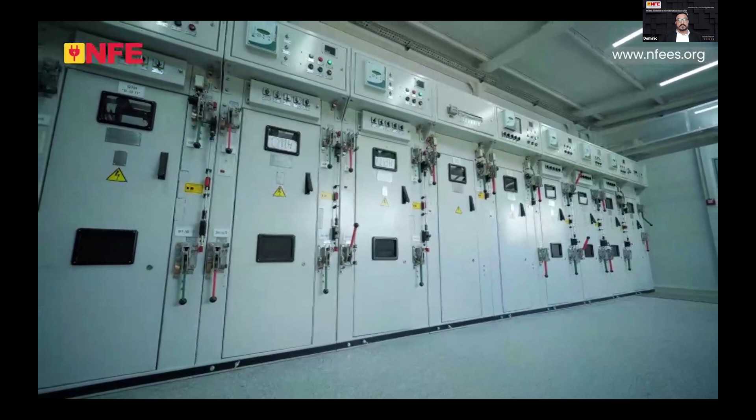Electricity is the heartbeat of modern India. It lights our homes, powers our industries, runs our hospitals, and connects every corner of our nation. Yet behind every switch and circuit lies a silent responsibility, the responsibility of safety. Every year, thousands of electrical fires and accidents remind us that one loose connection can change lives forever. According to national data, over 25,000 electrical fires occur annually, claiming lives, destroying property, and halting progress. Most of them could have been prevented through better design, better supervision, and better awareness. The country witnessed repeated accidents and increase in casualties due to poor installations, lack of inspection, and absence of accountability.

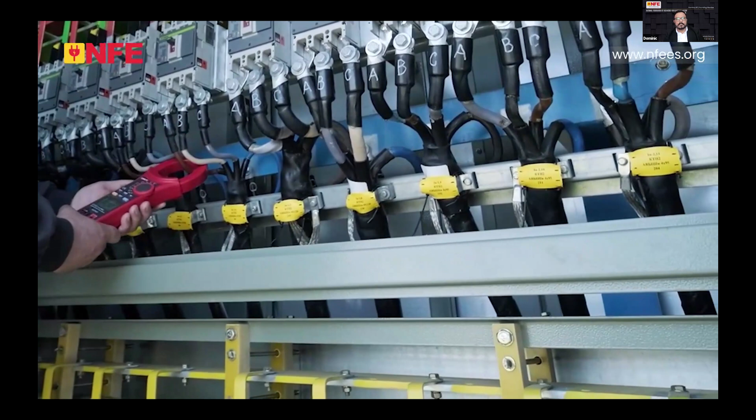They decided to take action. Thus began a movement, the National Federation of Engineers for Electrical Safety, NFE, started with a small group of like-minded professionals with only passion and purpose. They began spreading awareness through webinars, workshops, and training sessions, one city at a time. What started as a conversation soon became a nationwide movement for safety and change. In just a few years, NFE has grown into one of India's fastest-growing engineering societies, uniting over 2,500 plus engineers across 12 chapters in India. Each chapter drives its mission through learning, collaboration, and public awareness campaigns. NFE has conducted over 180 webinars and 50 workshops on the National Electrical Code of India in collaboration with the Bureau of Indian Standards, BIS. These programs are helping thousands of engineers stay updated with safety codes, best practices, and new technologies.

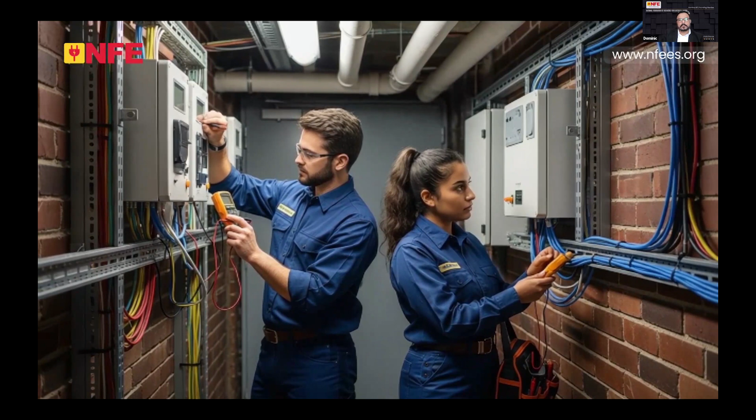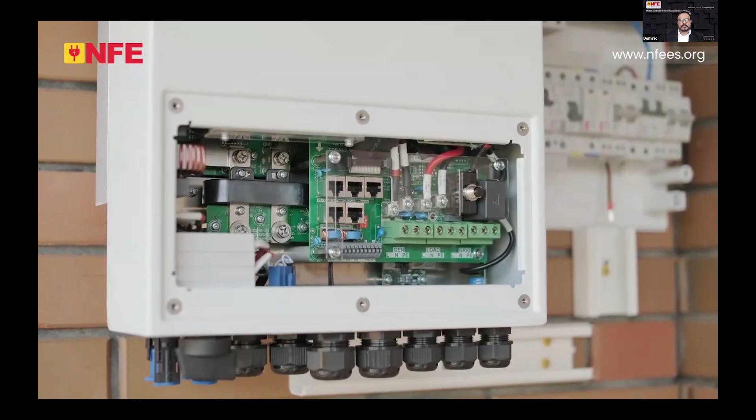NFE's signature annual event, ElecSafe, brings together government leaders, consultants, manufacturers, and innovators. It celebrates best practices and showcases electrical safety products that make buildings and industries safer across India. NFE's student chapters inspire young engineers to design responsibly while its professional programs help experts achieve certifications that matter. Together, we are building a new generation of engineers who think safety first. From a humble start to a national movement, NFE continues to lead with integrity, commitment, and purpose. Because electrical safety is not just a regulation, it's a responsibility. Together, let's build an electrically safe nation. National Federation of Engineers for Electrical Safety. Join NFE as a crusader for change, spreading awareness, training professionals, and advocating compliance.

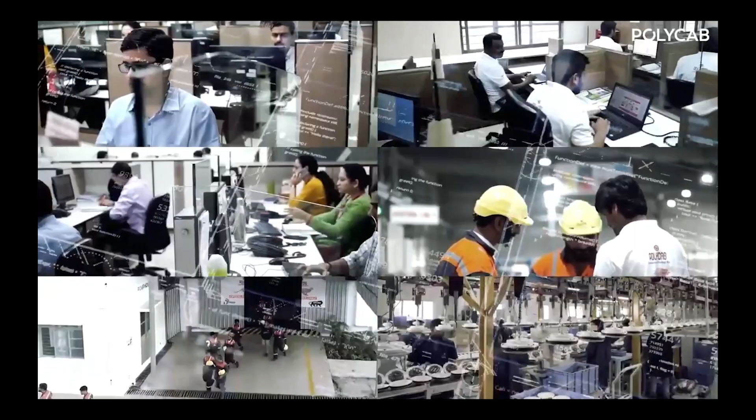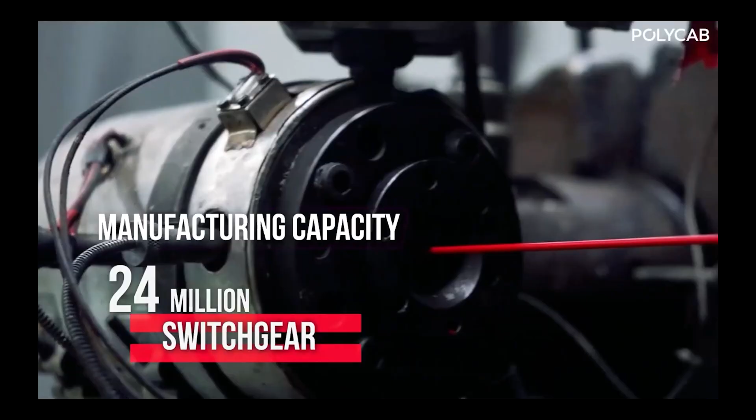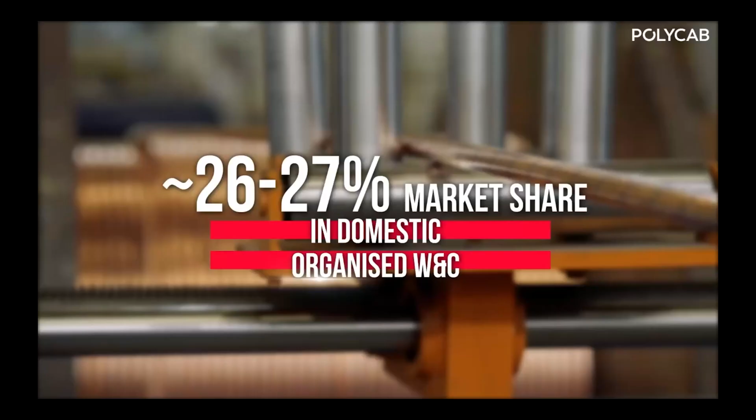In every heartbeat of a home, in every spark of a city, there is a rhythm powered by Polycab. Every great journey begins with a spark, a dream to connect, to conduct, to empower. From the very beginning, safety has been our promise, a promise that powers homes, protects lives, and builds trust. What began as a dream in a modest shop in 1964 was wired into reality in 1983 as Polycab India Limited, now India's largest wires and cables manufacturer. From wires and cables that protect your loved ones, to fans that cool your homes, to lighting that brightens your spaces, Polycab touches lives in more ways than you can imagine. Polycab is a true manufacturing marvel. With state-of-the-art facilities, backed by robust R&D and integrated capabilities. We are not just building products, we are partners in building India. From temples to tech, from railways to runways. Behind every product is a passionate team. 4,800 plus employees, 4,300 plus distributors, and 200,000 plus retail outlets united by Polycab Soch. Our commitment goes beyond business. Through CSR, we uplift communities in education, healthcare, agriculture, and more. Sustainability isn't a checkbox. It's the rhythm of our future, and we are tuned in, driven by a purpose to make homes safer and enable a secure India. Polycab has grown exponentially. As the nation progressed, Polycab became the nervous system, laying copper veins of connectivity. Polycab is truly a made in India brand. With a global reach, our pulse is now heard across continents. We are a family in this line from 4 decades, work hard and work for India. We want to expand our capacity too large because I want to grow, I want to get others grow, I want to support everybody and I want to see that our country should grow. Beyond all lies our true mission, people. Every product we build, every solution we deliver carries our vision of connecting all to a bright and safe future. When you choose Polycab, you choose safety, reliability, and a partner for life.

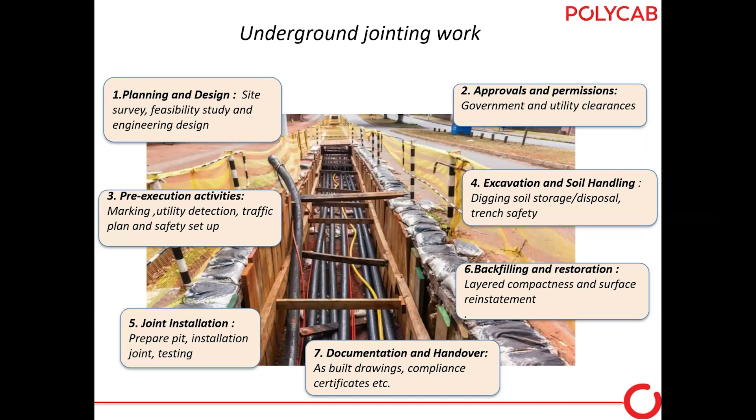So you can understand how crucial joints are. It's not just selling of the product actually. This is basically a large activity behind the jointing work. So as our topic says, the importance of cable accessories. Why important? So here I have mentioned why cable accessories are required.

Cable accessories are required because we have to join the cables. Basically we cannot manufacture cables kilometers to kilometers; cables come in 500 meters or 1000 meters. We cannot manufacture 2 kilometers, 3 kilometers, 10 kilometers because of two reasons: transportation restrictions and spool sizes. That's why you see cables always manufactured in 500 or 1000 meter lengths. Then cable jointing is the process of joining two cables with one another or terminating at one end.

Yes, I will show this pointer also. Here. Cable joints and terminations are used to connect cables and facilitate the flow of electricity. They are essential for connecting and terminating the cables at the equipment level. Cable joints and terminations ensure electrical, mechanical, and environmental safety of the system. So these are actually the functions, the requirements from cable accessories, and that's why cable accessories are required.

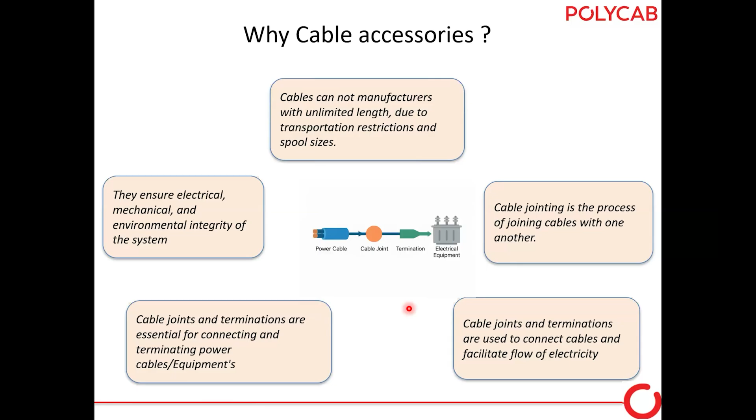So whenever we choose any manufacturer for cable accessories, heat shrink joints or cold shrink joints, any type of joints, what do customers expect from us? Heat shrink accessories must meet stringent standards to ensure reliability, safety, and longevity in the power system. So three parameters are always there whenever a customer chooses cable accessories. First, electrical performance. Environmental protection has to be provided, and safety and compliance.

In electrical performance, it should ensure current carrying capacity as per the cables and the requirement. So if cables are 11 kV, 300 square mm, the cable joints or termination should be the same. It should provide electrical insulation also, or provide electrical stress control. We will see what electrical stresses are there in detail in the coming slides.

Second, even though we connect two cables, we require environmental protection also. Sealing against moisture ingress has to be there. If there is a PILC type of cable, oil leakage should not travel from one side to another. Then resistance to mechanical damage; abrasion and chemicals should not affect the joints. In safety and compliance standards, it should guarantee earthing, provide desired shielding to the cable, and improve the fire resistance also. So any customer asking for joints or terminations expects these things from the manufacturer or the product.

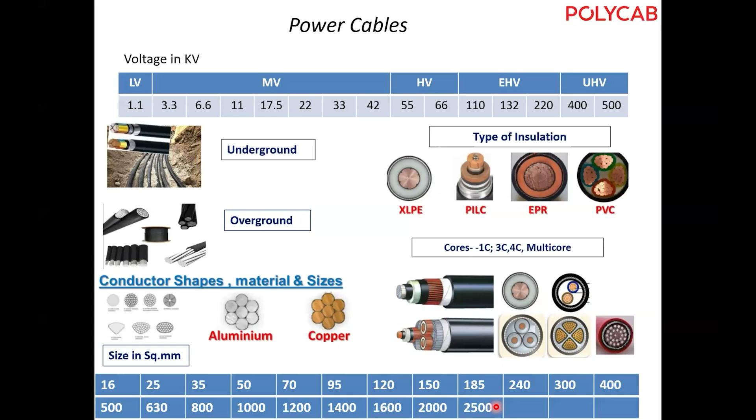Let's understand the construction of the cable. As I understand, you might all be from the same field, so you know the cable constructions very well, but I will just run through this in a few seconds.

This is a 3-core copper cable. Copper conductor is there, over that a semi-conducting layer, over that XLPE insulation, over that again a semi-conducting layer. These three cores bind together, and to give the round shape we use fillers.

Over that, wrapping tape is always there. Over the wrapping tape, armoring is there. And over the armoring, the outer sheath is there.

These conductors have different conductor shapes - sometimes solid, compact, compressed, and concentric. This is a copper cable; instead of copper, aluminum will be there.

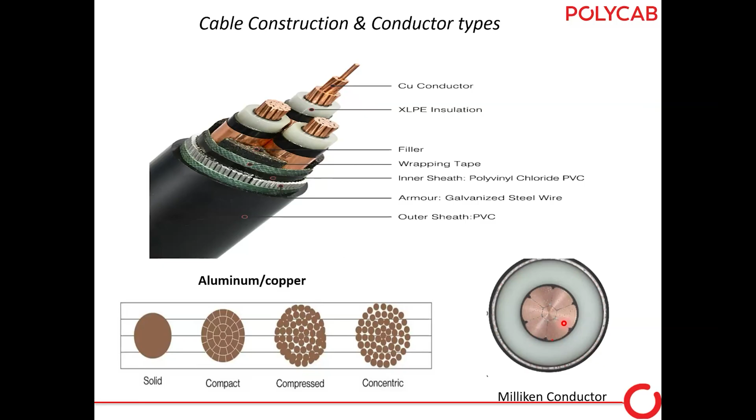Here on the right side, if you see, it's a Milliken conductor. These Milliken conductors are used for EHV. A Milliken conductor has small thin wires. This is used to reduce the skin effect basically, and that's why it's extensively used for EHV.

So let's come now to heat shrink cable accessories. There are two types of cable accessories. Whatever we discuss here right now is from the 1.1 to 33 kV cable accessories grade only. There are two types of technologies in India or across the world - one is heat shrink cable accessories, another is cold shrink cable accessories.

We are manufacturing only heat shrink cable accessories, and in India also 99% of customers are asking for heat shrink cable accessories. Cold shrink cable accessories are used where refineries or mines are there, wherever torch or flames are not allowed - they basically use cold shrink technology.

Heat shrink technology is extensively used because this technology proves how reliable it is. It's a trusted solution across industry, in terms of electrical insulation, mechanical protection, environmental sealing, and stress relief. That's why heat shrink accessories are widely used in India.

Key features are there - basically heat shrink accessories come as tubing, heat shrink tubes. Shrink ratios are generally 2:1 and 3:1. It has excellent dielectric strength, whatever heat shrink tubes are there. Resistance to abrasion, chemical and UV - even if these heat shrink tubes are used in chemical areas, or put in soil or anything on those joints, it has excellent resistance properties there.

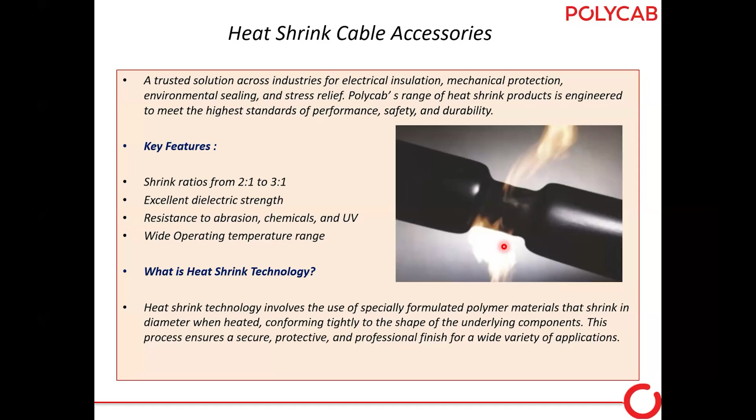This process ensures a protective and professional finish. When we say heat shrink cable accessories, it shrinks when you give it heat or flame. But this cross-linking always happens in this heat shrink technology.

There are two phases of the cross-linking process: one is chemical cross-linking, and another one is e-beaming or nuclear cross-linking. Chemical cross-link and nuclear cross-link are two different methods of cross-linking of the heat shrink tubings.

When heat shrink products undergo the cross-linking process, it enhances the thermal and mechanical properties. So by cross-linking, thermal and mechanical properties of the tubings increase.

Another term always used in heat shrink technology is memory effect. What is the memory effect? When you expand this heat shrink tube at the factory and send it to site, and when you again give heat to the tube, it shrinks up to whatever memory effect it has. For example, if I send one heat shrink tube which is size 100 by 50 - when I say 100, I expanded that tube at the factory by heating to 100 mm. Again, when I heat it at site, it shrinks up to 50 mm only. So that's a memory effect.

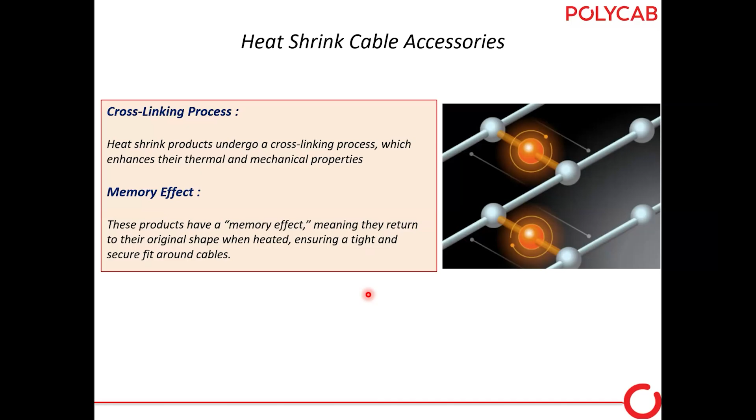General application - you all know wherever cables go, cable accessories are required. So industrial and commercial infrastructure, distribution networks, substations and switchyards, and renewable energy, solar and wind - these are the broad categories of cable accessories segments or application.

We can understand wherever cables are required, termination and joints are definitely required. Even in our household we use wires, and those wires we use through lugs, small lugs. So wherever cables are there, cable accessories are definitely required.

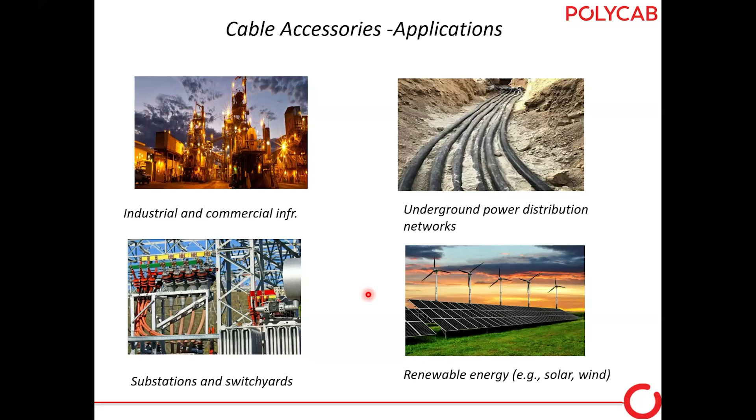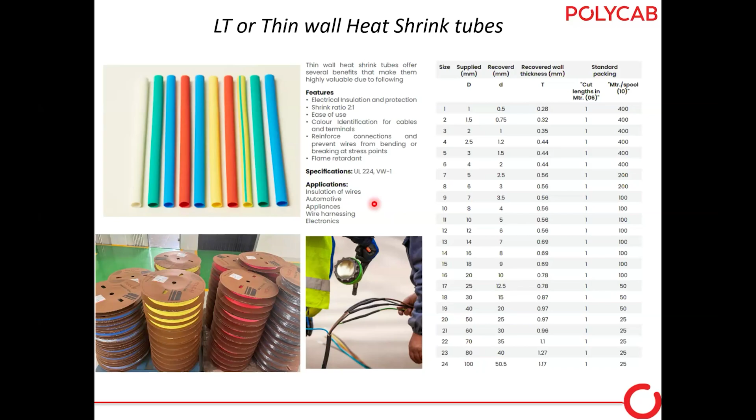Now let's come to the classification of cable accessories. Generally whatever we are discussing is for armored cables. So 1.1 kV low voltage and medium voltage - we broadly classify cable accessories as low voltage, up to 1.1 kV, and medium voltage, 11 kV, 22 kV, 33 kV. So we generally classify these cable accessories into two voltage classes.

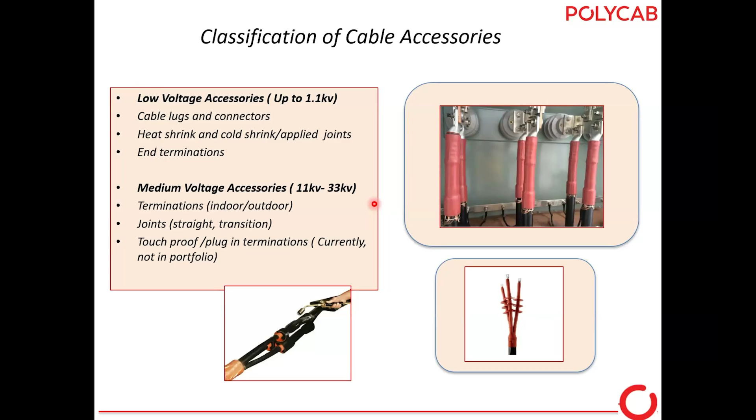Let's see low voltage cable accessories. Here I have shown the termination and joint photographs. Right now in many utilities, or in olden days, resin cast joints we were using. Resin cast joints - resin and hardener we take, we mix the resin and hardener and stir it and then pour it into the joint. It takes almost 2 hours to do the jointing work. But nowadays many customers are using heat shrink cable accessories.

So this is a termination. Let's understand - there are different types of low voltage cable accessories: heat shrink, cold applied, or resin cast joint. Let's see this termination - I will just show you how the termination happens.

So this is the lug. Over the lug we apply the XLPE insulation. We provide the mastic here - that mastic is for the sealant purpose, so water should not go from this point. That's why we provide a breakout, give an earthing element, and provide tinned copper braid. So this is a termination.

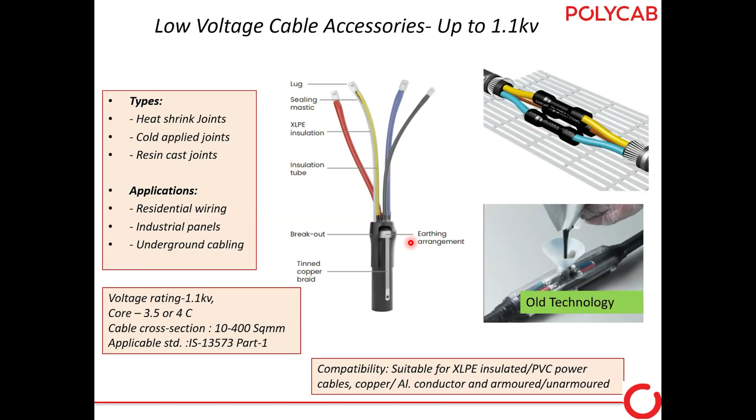Generally these LT cables come for a 3 core, and cable accessories come for the 3.5 and 4 core system. But if single core or 2 core is required, that also we can provide.

Let's see the medium voltage cable accessories now. Medium voltage cable accessories are there for 11 kV, 22 kV, 33 kV.

Types are based on the technology: heat shrink joints, heat shrink termination, cold shrink joint, cold shrink termination, and screen plug-in termination. Nowadays, screen or plug-in joint terminations are many times used wherever GIS or RMUs are there. Their customer uses the screen or plug-in termination.

Based on applications, we classify straight-through joint, transition joint, and branch joint. Transition joints we use wherever PILC to XLPE joints are required; there transition joints are used. Voltage rating 11 kV to 33 kV, single core, 3 core. Cable cross sections we use 35 to 400 square mm.

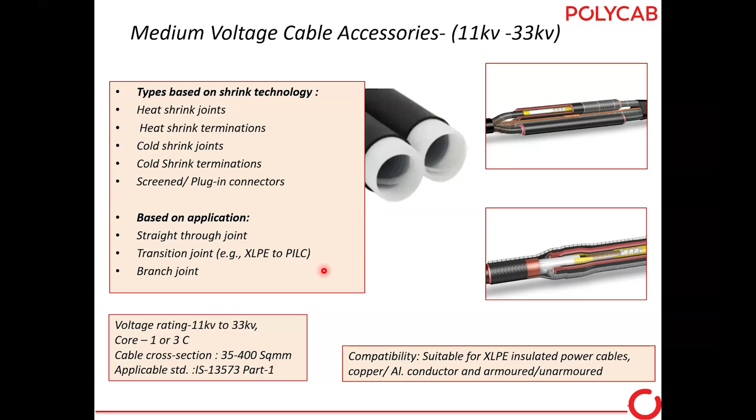Application standards are IS. These cable accessories are as per IS 13573 part 1, and testing is also as per part 2.

So let's see the joints first. There are different components required for making the joints, and each component has its own function, but I have broadly classified these under 5 categories.

One is electrical connections, stress controllers, voltage grading, electrical insulation, mechanical protection, and environmental sealing. For electrical connection we use ferrules. For stress control, we use semiconducting tubes. Let's see them one by one.

For electrical connections, we use the ferrule or the mechanical connector. It is used for connecting 2 cables. I have shown here the pictures. Jointers always prepare the cables as per the dimensions mentioned in the installation manual.

It prepares first the conductor, then prepares the XLPE insulation. From here to here, remove the semiconducting layer. That way, the jointer prepares the cable as per the installation manual given in the box, and only as per that manual.

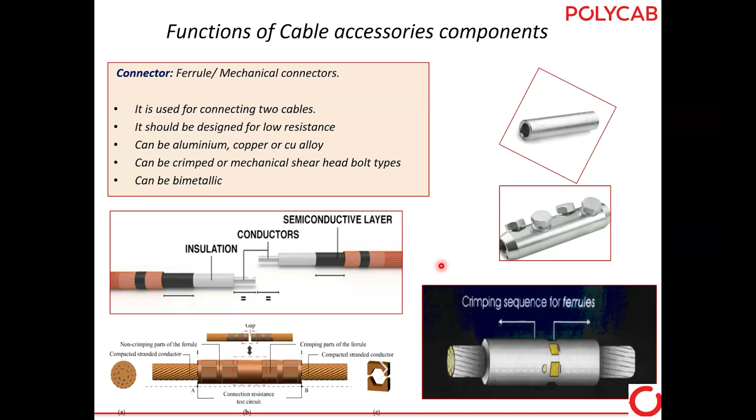Let's see the next component, the stress control tube. This is very important in any cable joint and termination. Whenever you go from 11 kV to EHV, stress control tube, or stress cone as we say in EHV, is very important. If the stress control tube is not up to quality standard, the joint or termination definitely starts failing early. So designing of the stress control tube is very important.

The stress control tube's impedance should be precisely defined. It's a well-balanced permittivity that has to be there in a stress control tube.

Let's see what happens if we do not use the stress control tube in the joint or termination. Here I have shown 2 photos: this one is without stress control tube, and this one is with a stress control tube.

So the jointer prepares the cable. This is the conductor, over that the XLPE insulation, and over that the semiconducting layer. This is the actual construction of the cable. If we do not use a stress control tube and we charge this cable or joint...

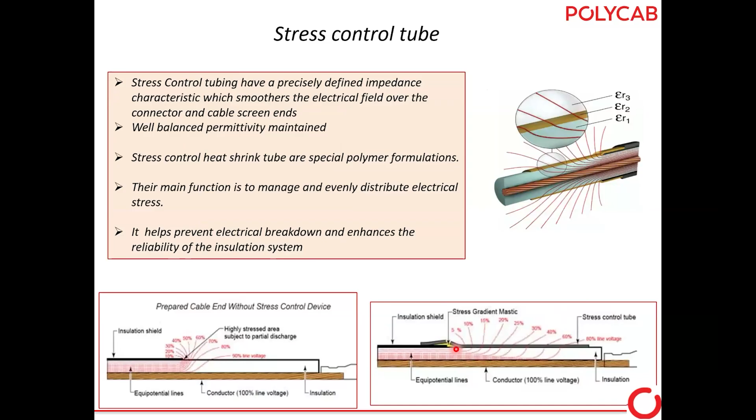Then we require stress grading mastic. So wherever we cannot use the tube, like in the last slide here in the step, because here air always forms, at this point we use the tape. Likewise, this stress grading mastic is used. So this is a very critical component again. It manages electrical stresses at the edge of the semiconducting screen, like here, and over the insulation.

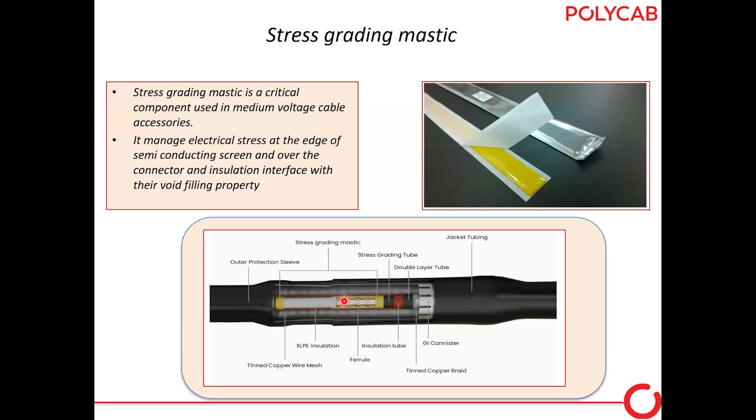Whenever we connect the two cables with the ferrules, we do the crimping activity at this position. So after that, we use stress grading mastic at this point. Now, let's understand, we are going as per the cable construction only. Whatever cable layers are there, that way only we are going.

Like the cable has the conductor, over the conductor a semiconducting layer, over the semiconducting layer XLPE insulation, and over the XLPE insulation a semiconducting layer. So that way only we are also building our joints and terminations. Ferrule, after the ferrule, semiconducting layer, over the semiconducting layer, XLPE insulation. So that is the electrical insulation.

This is a dual wall co-extruded tube. Inside is the insulation, the outer side is the semiconducting, the same way as the cable construction. It provides both electrical screening and insulation, making it essential for maintaining the integrity and safety of the power system.

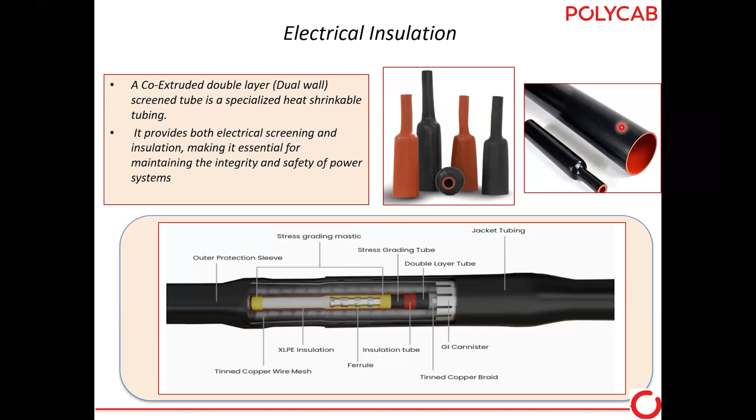Now, next, the mechanical and environmental sealing. Like we have built the electrical insulation, over that the armoring comes. So what's the function of armoring? One function is that the short circuit current has to be passed, and another one is that mechanical strength has to be given to the cables. So we use the canisters. We provide canisters here for mechanical strength, short circuit current, and continuity of the armoring.

Over that we provide the outer sleeves, basically exactly like the cable outer sheath. So this is the cable outer sleeve that we shrink, such that water or moisture should not go in from this position. If it goes inside the joint, then the joint will definitely fail today or tomorrow.

So the strongest point, I can say, is that in any joints and terminations, water should not go in. It should not be allowed. Like in Mumbai or coastal areas, the water table is very high, and these joints are always vulnerable to water going inside the joints and terminations. So the outer sleeves should always shrink onto the cable in such a way that water does not go in from that point.

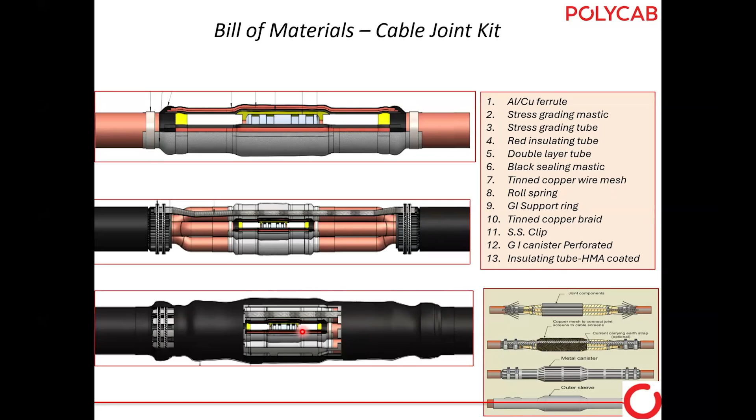So these are, I can say, the 5 different functions of the jointing components, as I mentioned: electrical connection, stress control and voltage grading, electrical insulation, mechanical protection, and environmental sealing. With these, our joints are made.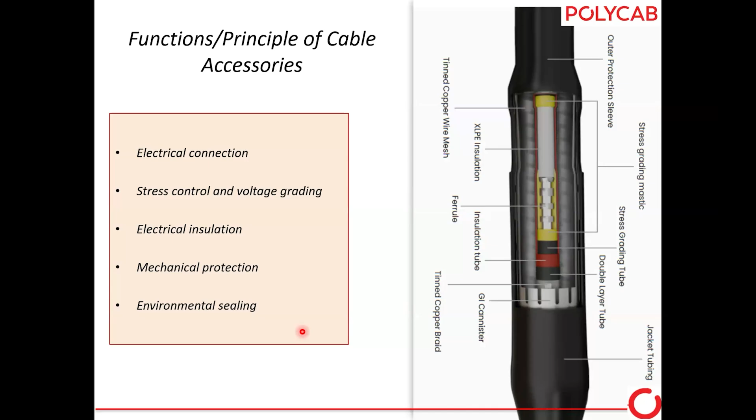So with this, we have just completed our medium voltage joint. In the first 2 slides, we completed LT joints and LT terminations. Then after that, we completed joints. Now let's go to the termination. There are 2 types of termination classification: one is indoor termination, another one is outdoor termination.

Again, here heat shrink, cold shrink, or epoxy types of terminations are there. Epoxy type terminations are a very old technology. Nowadays no one uses epoxy type terminations, but heat shrink and cold shrink are generally used. Voltage ratings 11 kV to 33 kV, single core, 3 core, cross section 16 square mm to 1000 square mm. Again, similar to what we saw in the LT termination, some components are here.

Sorry. So like lugs, over that lug seal tubes are there. Over that insulating tubes come. These creepage extenders we use for the extension of creepage, or sometimes people say the rain shed there. This is the insulation screen. Then this is breakout and earthing arrangement we do. So overall, this is the outdoor termination.

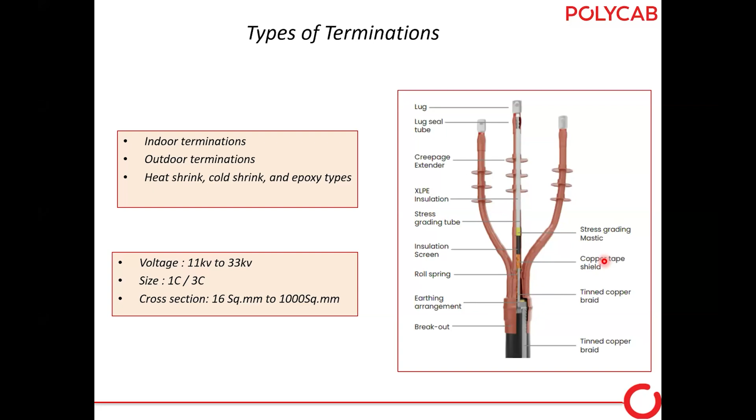Again, like we saw in the joint, different components. Here termination also has the different components. So heat shrink, but function wise, it's similar to joint component function. So heat shrink, stress control tube, anti-tracking tube, rain sheds, lugs, mastic sealant tape, earthing braid and lugs, armor continuity, cleaning kits. So with these components, our terminations we do.

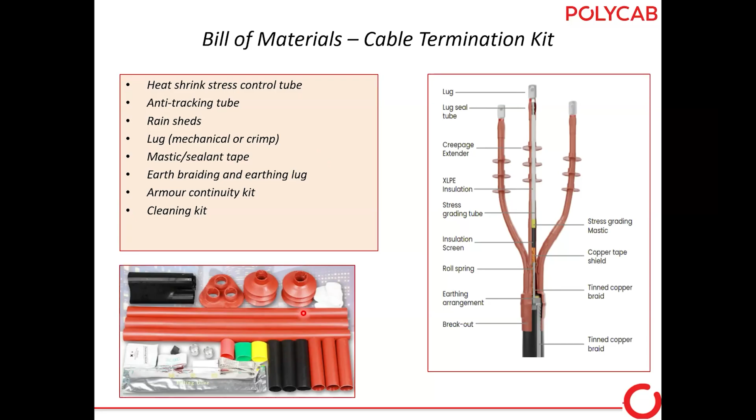One very good thing I always say is that termination and joint is always 50-50. 50-50 means what? 50% makes at the factory, 50% makes at the site. So 100% finished product is at site only. So many a times, when customers, even someone who doesn't know about joints and termination, see these components, okay, this is the products. So they many times are surprised that ये तो finished products नहीं है. So this finished product happens at site only.

Again, same way, in the joint, ferrule was there, here termination lugs are required. To terminate the termination to the equipment, transformer, RMUs, or whatever the place, we require the lugs. It is a current carrying part. It is used for connecting equipment or cable. It is always designed for low resistance. It is always aluminum, copper, or bimetallic.

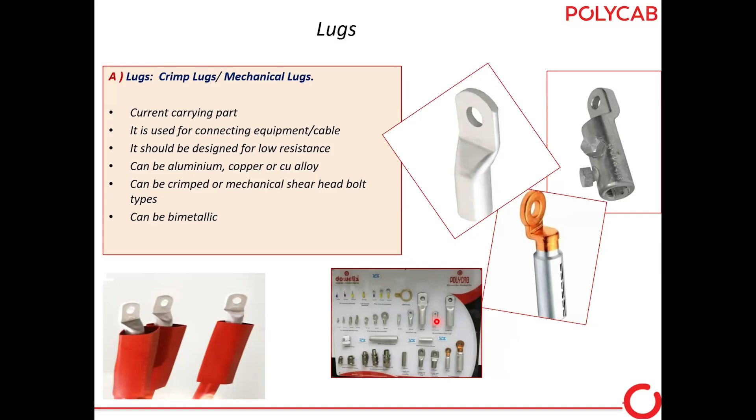So most of the people might know that we have Dowells, actually it's a Polycab subsidiary where we are manufacturing our lugs and glands, and these are the lugs or ferrules we use in our joints and termination. Again, like in joint, stress control tube is required in terminations also. Same functions what we saw in the joint, so I will not repeat here. That's the function of the stress control tube.

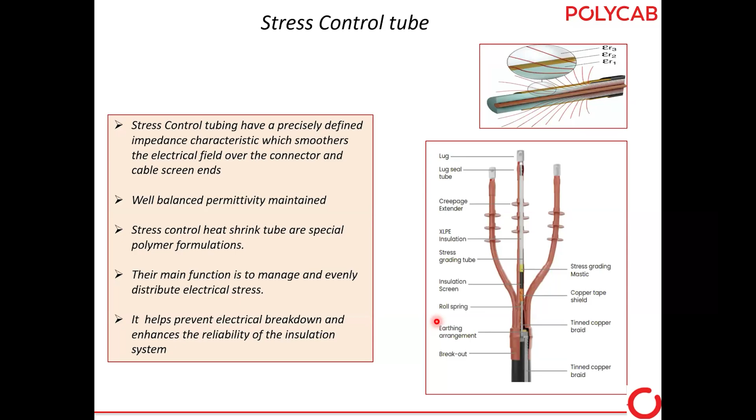These three components are required, and they have different functions. First is the anti-tracking tubes. These are a specialized heat shrink insulating tube. It reconstructs the cable by providing insulation and tracking resistance. It prevents surface electrical tracking and consequent flashovers. These tubes are especially important for indoor, outdoor and polluted environments. It should be UV protected.

Rain sheds. These rain sheds are used to extend the creepage of the termination. Breakouts. These medium voltage breakouts are electrically insulating, anti-tracking, UV resistant, weatherproof and flame retardant. These breakouts are used for trifurcating the cables, RYB, and from that point, water should not go in the cable.

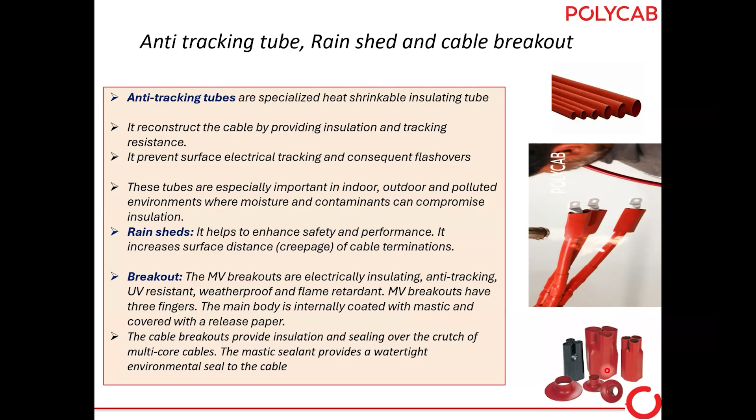Now let's see the manufacturing technology for these cable accessories. Generally in factories, as I said, 50% products are manufactured and 50% assembly happens at site, and then only 100% products are ready. So in factory, what processes are there? Compounding. These are the compounds, and these are the compounding blending machines. We take the base polymers with various additives to create specific properties or tailor heat shrink tubes.

After compounding, extrusion happens. These are the extrusion machines we have in our Halol factory, and we create the heat shrink tubes. Then we send these tubes to the e-beaming process. After e-beaming, the tubes get mechanical strength, thermal stability, chemical resistivity, and it builds the memory effect. As I said earlier, there are two processes to give this: e-beaming and chemical. We manufacture all heat shrink tubes only by the e-beaming process.

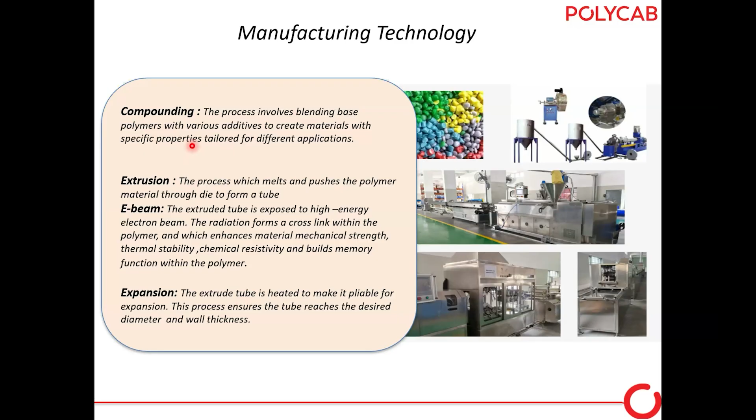After e-beaming, expansion happens to the heat shrink tube. Take the example of 100 by 50 heat shrink tubes. We expand at factory to 100 mm. When the tube goes to site, the jointer heats it and it shrinks up to 50 mm, 2:1 ratio. So all four activities happen in-house in our factory: compounding, extrusion, e-beaming, and expansion.

These are our manufacturing facilities. As I said, e-beaming we do in-house. This is the e-beaming machine. We have almost 4-5 e-beaming machines where we do e-beaming of the cables. You might have heard many times cables are cross-linked through e-beaming. All solar cables and wires are cross-linked through e-beaming. So we do these e-beaming activities daily.

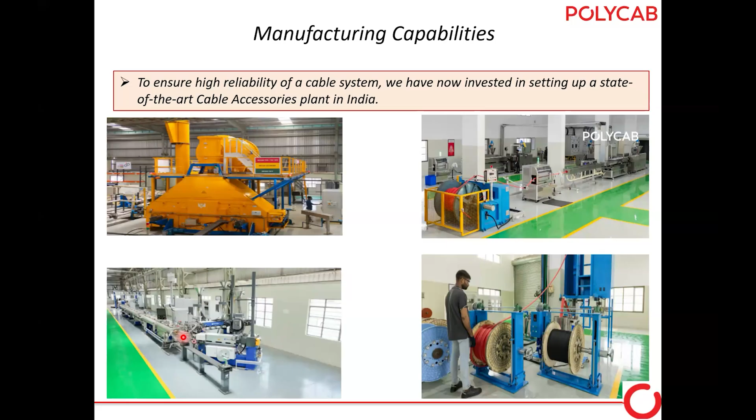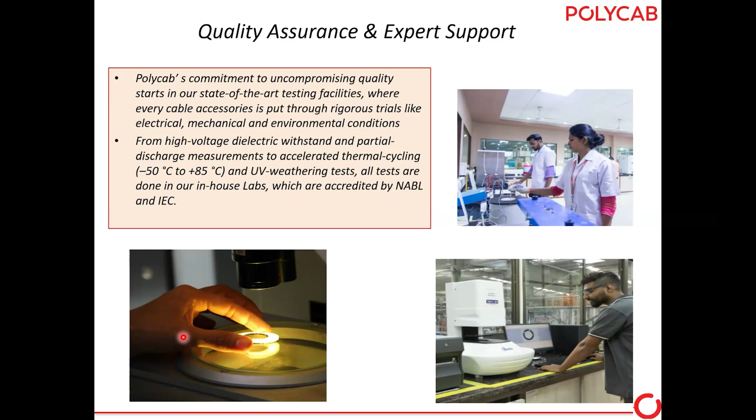This is the extrusion machine. This one is also an extrusion machine. These machines are from Europe. And this is a well-known e-beaming machine. We are manufacturing cables up to 220 kV right now, and our quality standards are very high. We have highly skilled technical experts, and the same experts we use for the cable accessories also.

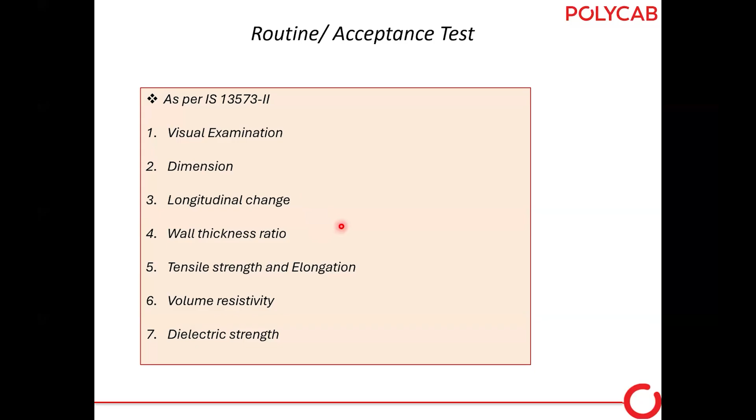All the routine tests or acceptance tests, whatever is mentioned in the IS 13573 part 2, we do at our factory. Visual, dimensional, longitudinal change, wall thickness ratio, all these tests we do at our factory. These are the testing facilities we have. I will just run through this.

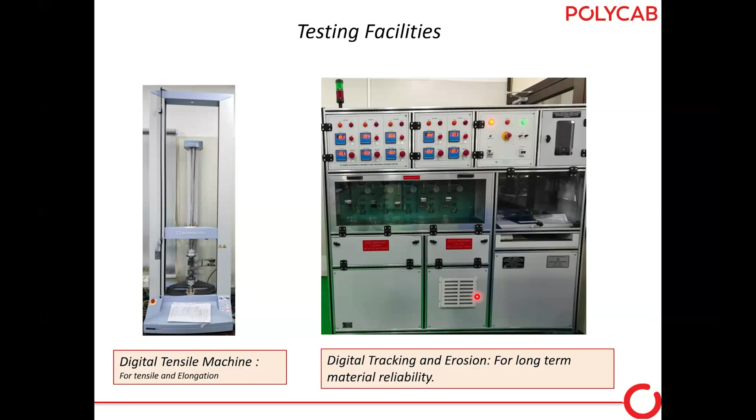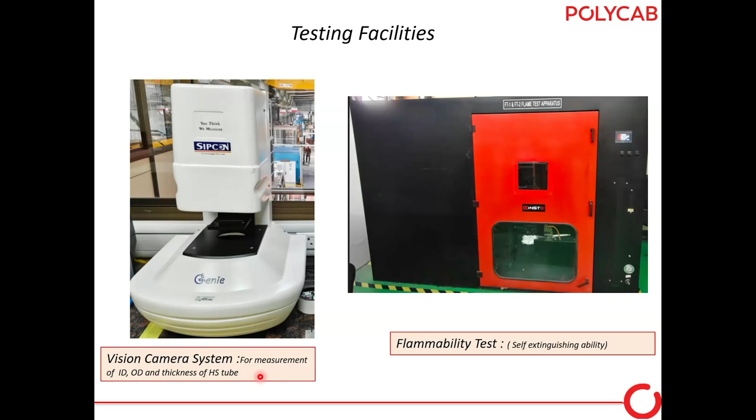Digital tensile machine is this, for tensile and elongation. For doing the tracking and erosion, we have these machines. We do all the tracking and erosion tests in-house. Vision cameras we have to measure the ID, OD, and thickness of the heat shrink tube, to see the uniformity of the heat shrink tubes. Flammability test we do. Hot set test we have. Hot air ovens we have. Volume resistivity test we can do on our testing facility.

Let's see why Polycab actually. When I say Polycab, because we use the cables, cable accessories, Dowells, and cable joints and terminations. All are in-house manufacturing facilities we have. All machines are European. Tubings we manufacture through the e-beam technology, which is more reliable and high performance class. As I said in my first slides, we have 4,600 dealer distributor networks, so readily available stocks at dealer distributors.

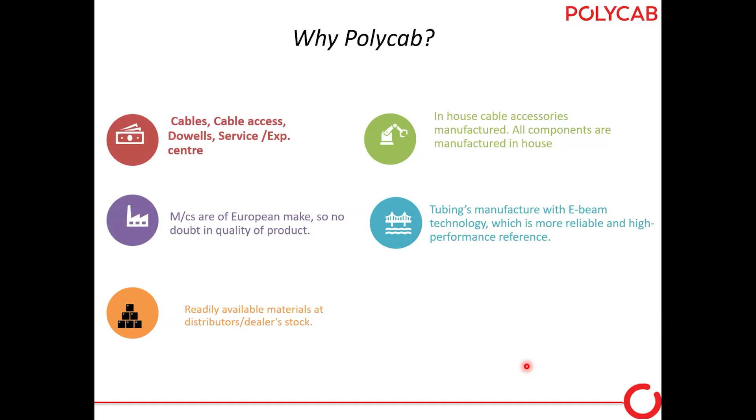Here I have listed the benchmarks. We have in-house manufacturing of heat shrink tubings, in-house radiation beaming technology. Our test lab is NABL accredited. Radiation crosslinked heat shrink sleeves we have in-house. All the extruders are of European make. Connectors, Dowells and lugs, those are all in-house. We have a big EPC contracting team also, so we take EPC jobs.

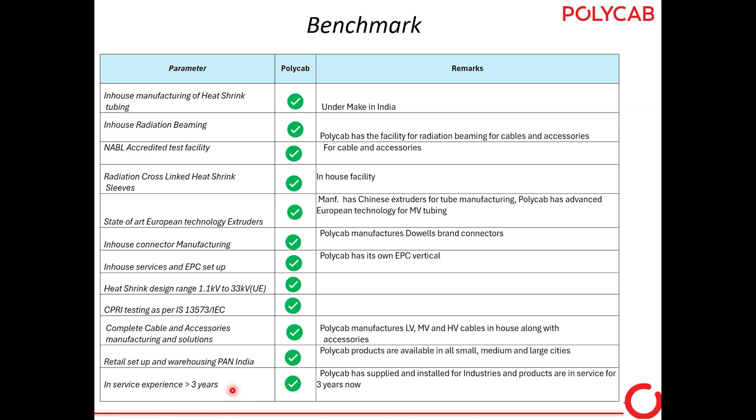All our products are type tested as per IS 13573. Complete cable accessories manufacturing solutions are there. Retail setup we have. And our joints and terminations are in service for the last 3 years. In our own factory, we have used this termination on our express feeder, so whatever supply is coming to the Polycab factories is through our terminations only. So this is the overall cable accessories presentation.

With this, I finish our technical session on cable accessories, joints and terminations. If anyone has doubts, they can put them in the chat and we can discuss your questions.

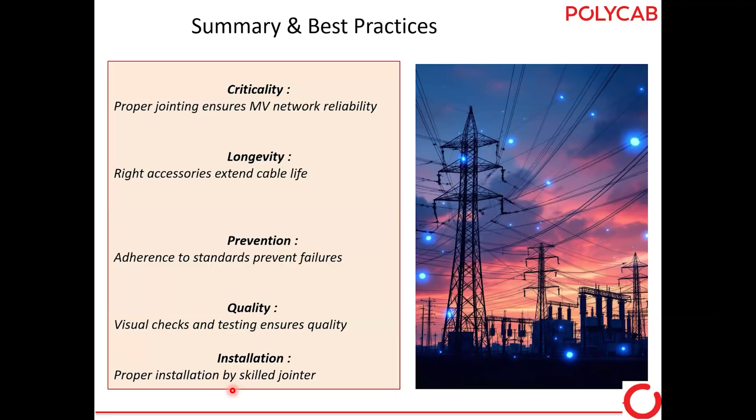The first question is, why is government approval required to execute a cable joint? Where is it mentioned, in any CEA or government acts? Government approval is very necessary. Even if a manufacturer says, I have tested the products and I have all the test reports, someone has to verify whether he genuinely tested it, and whether he is supplying the products as per the test. It is an Indian government guideline, so everyone has to test, not only cable accessories but all electrical products.

The next question is from Mr. Sarale Muthu Murugesan. How to make joints for fire survival cables? Fire survival cables come with a special type of outer protection sleeve, and the joint has to be made according to the cable's outer sleeve. The process of jointing will be the same, but the material has to be as per whatever the customer specifications mention, FRLS kind of things. The jointing process will remain the same.